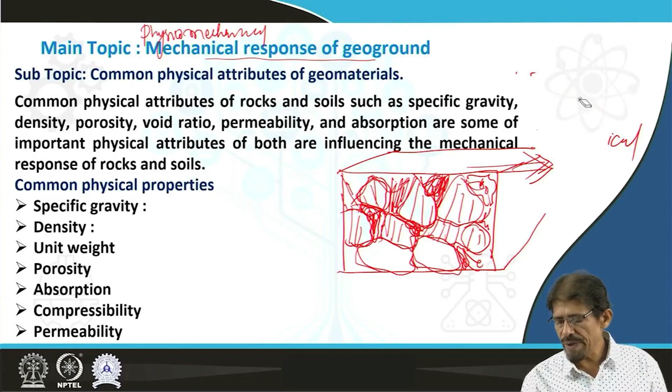As the name indicates, the term physico-mechanical is made up of two words: physical and mechanical. Physical attributes are physical properties. We have different types of physical properties. Here I try to enlist some physical properties that influence mechanical response, which we utilize in engineering geology.

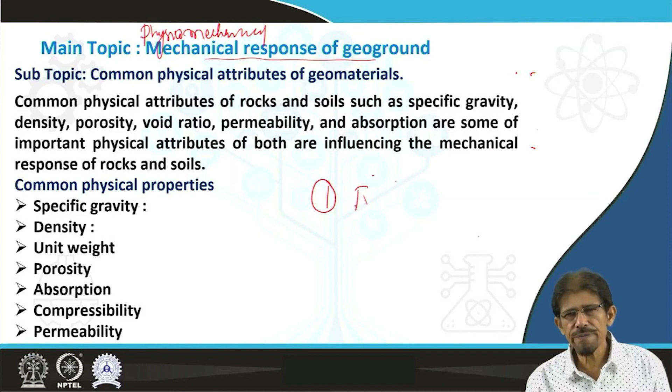These are common physical properties we have been practicing in geology from our beginning classes at the undergraduate level. The major physical properties in general describe, first, form; second, color; third, streak; fourth, luster.

Fifth, hardness; sixth, cleavage; seventh, fracture; eighth, some special properties. And partially we are utilizing specific gravity here.

These parameters are useful for selection of geomaterial from different commercial points of view, and this helps in identification of rocks and minerals.

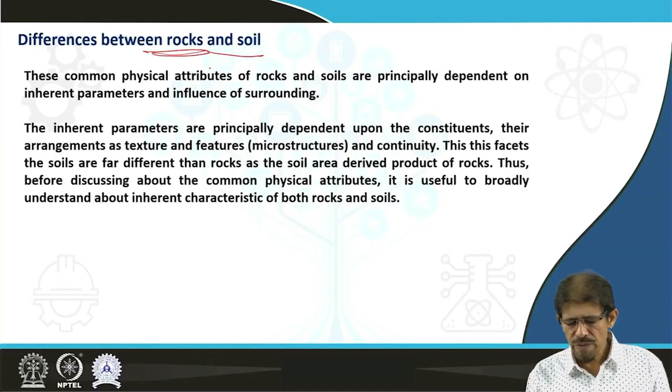If we are going to see the difference between rock and soil, this difference principally depends on the compressibility.

Compressibility depends on the arrangement of constituents. Due to arrangement of constituents, there are changes in arrangement of the grains and the availability of voids or pores. This availability of voids or pores, and the mineral constituent and arrangement of the constituent, we recognize in form of texture and microstructure.

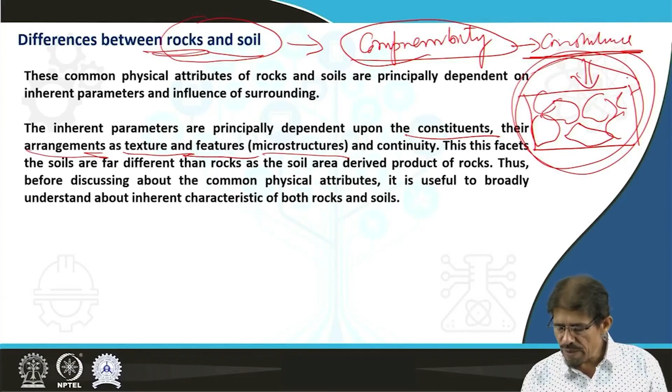In this way, we are going to see the rock is different than the soil.

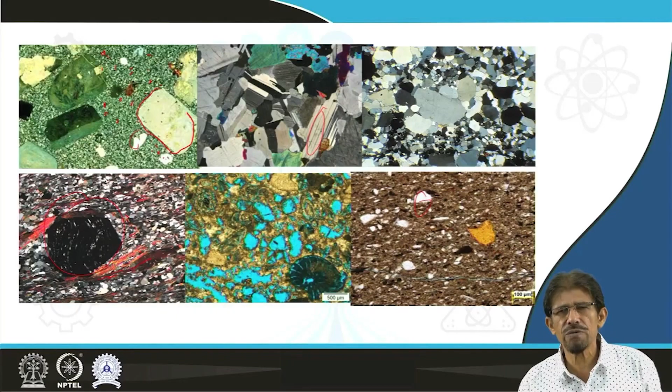Here you can see some of the photographs. This is the rock grains supported by some finer materials. Some of the portion you can recognize as gaps. Here you can see some microscopic gaps due to arrangement of this type of material. These photographs represent the arrangement of the mineral constituent in different fashion in different types of rocks.

You can see here the gap in case of soil. Soil gaps we can recognize easily. Here the gap you can recognize easily.

These voids are differentiating soil from rock. Due to presence of these voids, the compressibility is a compressible component. It means the degree of compaction in case of rock is more, and the degree of compaction in case of soil is less in comparison to rock.

So one by one we are going to discuss different properties. First we are going to discuss density. Density, very simple, density of any material is defined as the mass per unit volume. If we are able to know the mass of any rock, then we are able to calculate density.

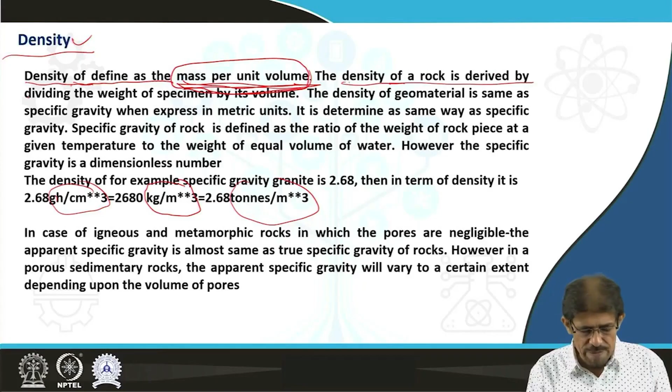As the unit, it is important to use kg per m cube, or ton per m cube, or gram per cm cube. The density of a rock is derived by practically dividing the weight of a specimen by its volume.

Technically, we are going to weigh this volume and modify these things with help of some concept of G and others. Actually, the density is the mass per unit volume. So volume we can recognize, and we can recognize mass from the weight.

The density of geomaterial consisting of rock is the same as specific gravity when expressed in metric units, but when we discuss the relative concept of density, then we define specific gravity because we measure this specific gravity with respect to water.

It is determined the same way as specific gravity. Specific gravity of rock is defined as the ratio of weight of rock pieces at a given temperature to the weight of an equal volume of water.

Due to relative appearance, what happens is the unit of volume of water and this rock concept eliminate the units. Therefore, this specific gravity has no unit.

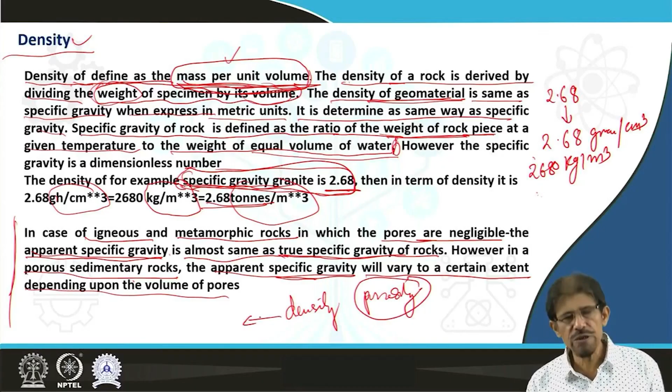The pores are more, density is less. Density less, pores are more. It means we can say that density and porosity have an inverse relationship - one is increasing, another is decreasing.

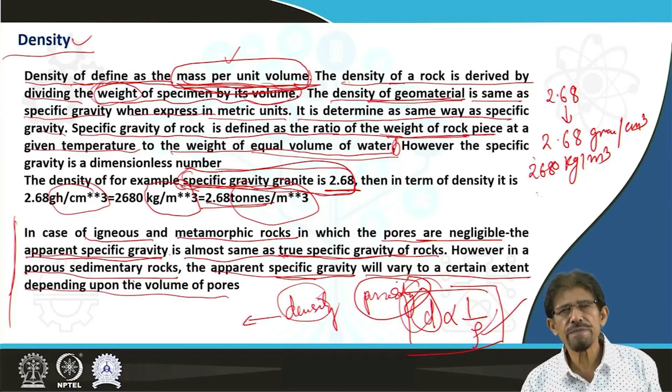Next property, and concerned to this, here formula-wise again I try to attract your attention. This density is m by v, presented in gram per cm cube, and this is simply the density of a rock specimen dividing weight of the specimen by its volume. Other things we have already discussed.

If we are going to classify density, then we can categorize this density as dry density, saturated density, grain density, and bulk density. Dry density is the weight of dry specimen with pores free of water per unit volume.

Very simple. Saturated density is the weight of rock specimen soaked in water per unit volume. Grain density is the weight of the powder of rock samples with respect to volume, that is per unit volume.

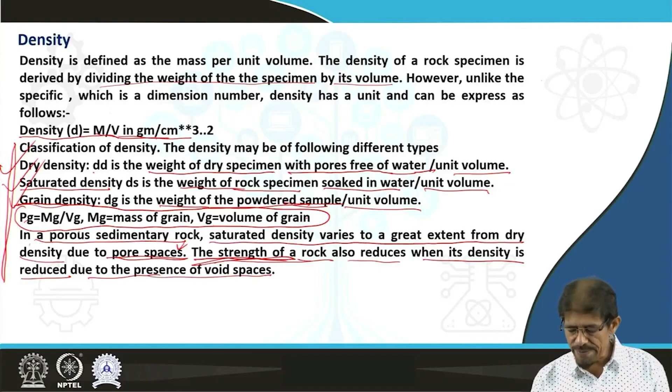The mechanical response of rock, that is the strength of rock, also reduces when its density reduces due to presence of voids. Indirectly we can say that strength increases when density increases, and decreases when density decreases. Not always true, but often.

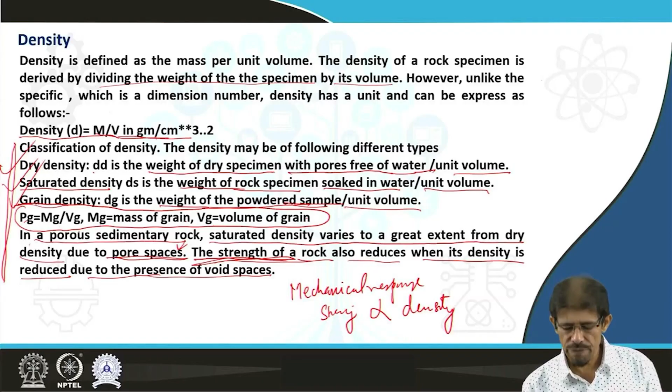Bulk density, as the name indicates, is defined as mass of a unit volume of geomaterial or rock. It depends upon the mineralogical composition, porosity, and amount of water present in pore spaces or voids. A bulk volume of rock specimen is the pore volume Vp plus grain volume Vg.

Let me draw your attention here. This simple diagram shows the grain and the pores. This is a pore and this is a grain. So pore volume, this volume, and grain volume, we recognize as bulk volume.

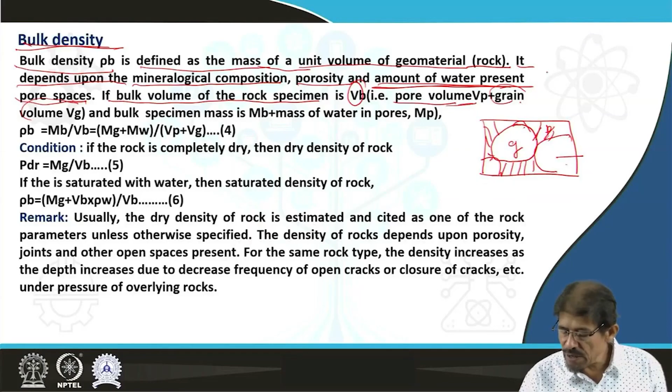Bulk volume, that is pore volume V pore plus V grain. What is the volume covered by this grain and what is the volume covered by this pore? This bulk specimen mass we recognize as MB plus mass of water in pores.

So bulk mass, the bulk specimen mass, is MB plus mass of the water in pore, or this mg plus mass of the water in pores, that is the bulk mass.

This bulk density is the ratio of the bulk mass divided by bulk volume. Bulk mass is the mass of grain plus mass of water present in pore, divided by volume of grain plus volume of pore. In this way we calculate bulk density.

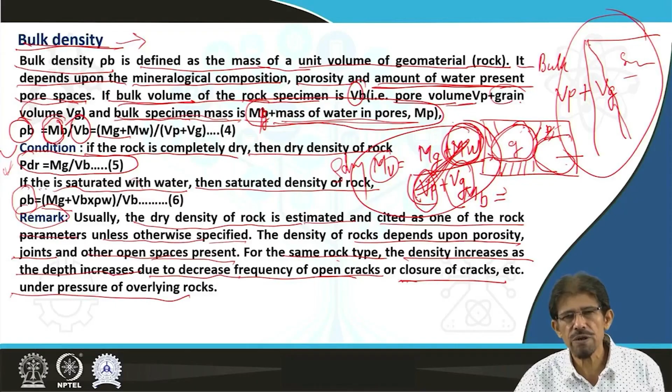In case of sandstone, it is different. In case of shale, with respect to depth, it is different. These aspects are generally utilized by geophysicists or petroleum engineers during logging concerned with the change of density.

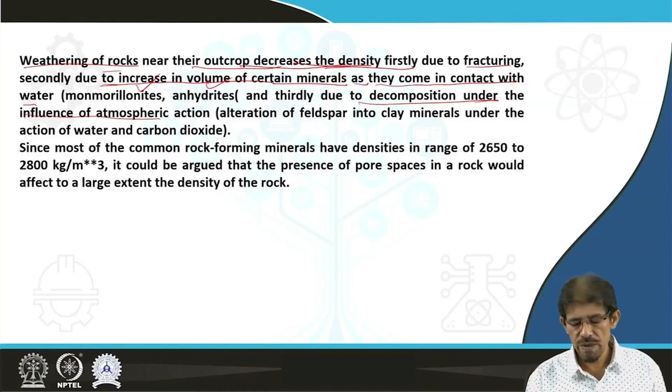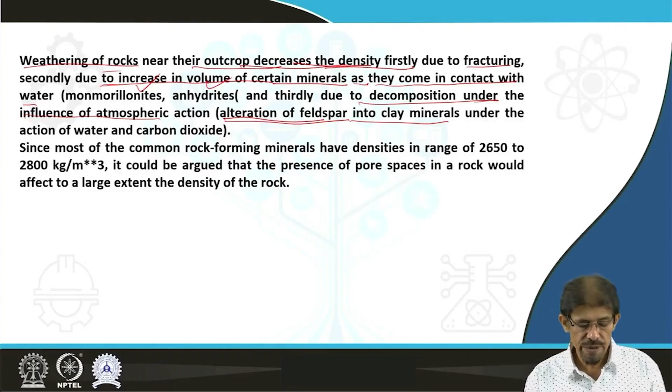Weathering of rock near the outcrop decreases the density due to fracturing, and secondarily due to increase in volume of certain minerals as a result of decomposition when they come in contact with water, for example Montmorillonite and anhydrite. Thirdly, due to decomposition under the influence of atmospheric action, for example alteration of feldspar into clay mineral under the action of water and carbon dioxide. So weathering also influences the density.

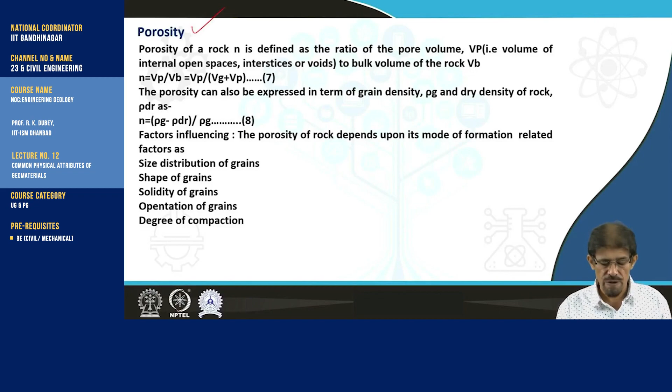So these are the factors that influence density. Next is porosity. Porosity is a very important parameter influencing the mechanical response of rock as well as the hydrological response of rock. The porosity of rock is defined as the ratio of pore volume.

Porosity is the ratio of pore volume, the volume of internal open spaces, interstices and voids, to the bulk volume of rocks. It is simply Vp by Vb, where Vb represents bulk volume and Vp represents pore volume.

P stands for pore, B for bulk. So porosity is Vp by Vb, where Vp depends on the pores, and Vb is a summation of both, since rock is made up of grains and pores. So this bulk volume is the bulk volume due to grains plus the bulk volume due to pores.

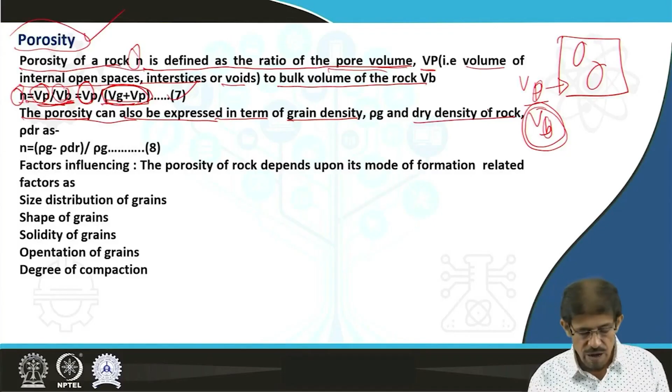This relationship is important for estimating porosity if some values are given. Porosity can also be expressed in terms of grain density or dry density of rock, since density has this type of relation. Then porosity can be estimated as the density of grains minus the dry density, related to grain density. In this way also we can estimate porosity indirectly, not directly.

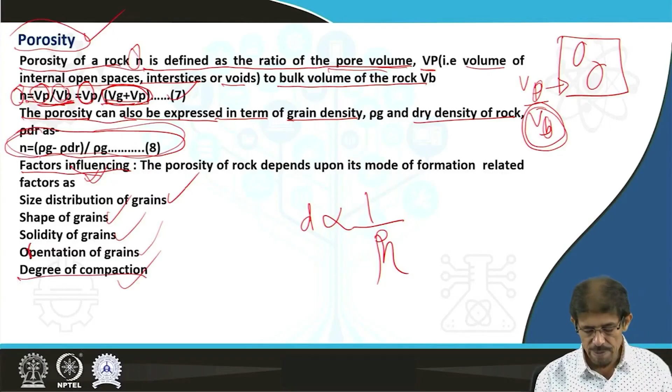The major factors influencing the porosity of rocks or soil are the size distribution of grains, shape of grains, solidity of grains, orientation of the grain, and degree of compaction. These parameters of the rock are going to influence porosity.

The next property is water content, which also depends on the pores. The water content of a rock is the ratio of the mass of water in the rock pores or void spaces to the mass of a perfectly dried specimen. In this way we determine the water content present in the pores.

This depends on the availability of the voids or pores. The saturated water content, when the pores are fully saturated, is the ratio of the mass of water in rock pores at saturation to the mass of a dry rock specimen, as described previously. This is presented in the form of a percentage.

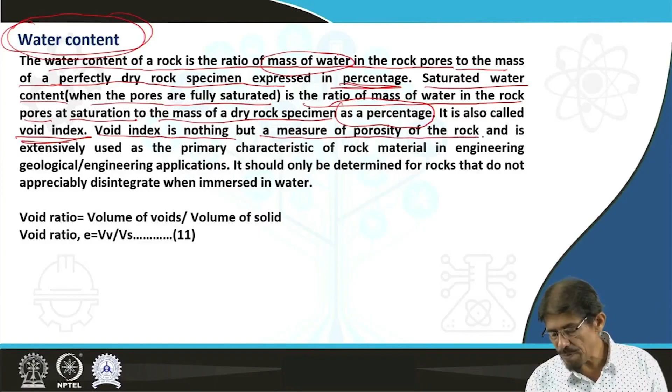Another term we utilize is void index or void ratio in engineering. Void index is nothing but a measure of the porosity of rock, and it is used extensively as a primary characteristic of rock material in engineering geological or engineering applications.

It should only be determined for rock that does not appreciably disintegrate when immersed in water. If the rock is soluble in water, then determination of the water content is very difficult. For example, rock salt is soluble in water, therefore the water content present in rock salt cannot be truly and practically determined.

The void ratio, as you are well familiar, is the volume of the voids with respect to the volume of solid, and the void ratio is utilized similar to the porosity and others.

The next very important parameter is unit weight, widely utilized in the field of geotechnical engineering, civil engineering, and engineering geological applications. It is the same as we use in the case of density, everything the same. Here we recognize the unit weight of a unit component of the rock.

In civil engineering work, the term unit weight is used for different types of calculations related to the unit weight of concrete, unit weight of water, unit weight of brick, mortar and others, which is the same as density when expressed in the unit of the metric system.

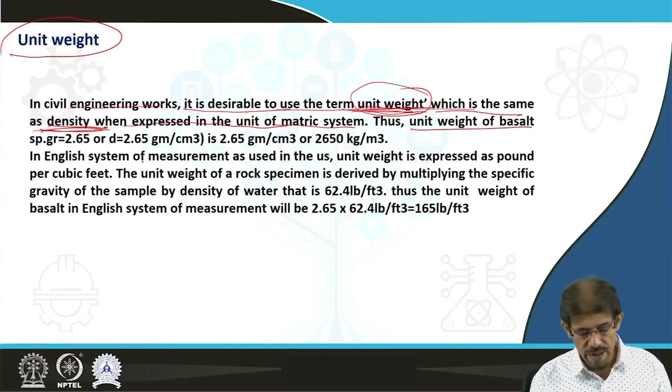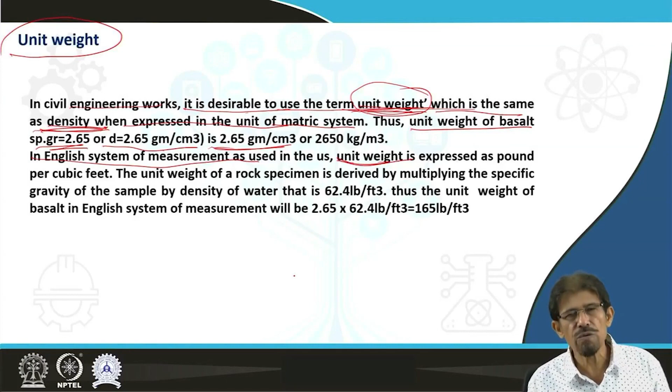For example, the unit weight of some rock like basalt, with specific gravity 2.65, then density is 2.65 grams per cm cube. In the same way we recognize the unit weight here. In the English system of measurement, we express unit weight in terms of pound and feet and others.

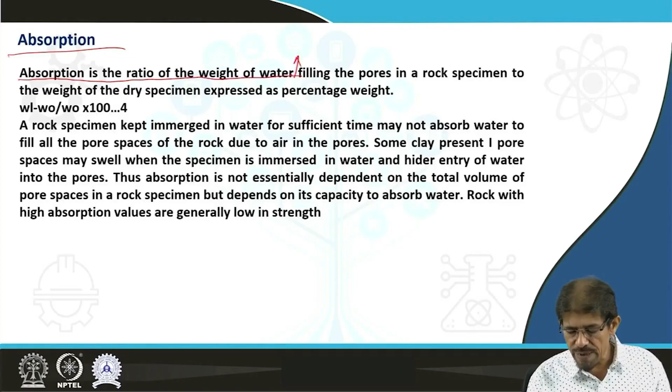Absorption is another parameter. Absorption is the ratio of the weight of water, similar to water content, filling the pores in the case of a rock specimen, to the weight of the dry specimen, expressed in percentage.

A rock specimen kept immersed in water for sufficient time may not absorb water to fill all the pore spaces of the rock due to air in the pore spaces. For example, some clay present in pore spaces may swell when the specimen is immersed in water and hinder the entry of water into the pores. Therefore, some of the pores present in sandstone or other rocks where clay is present in pores do not allow for full saturation.

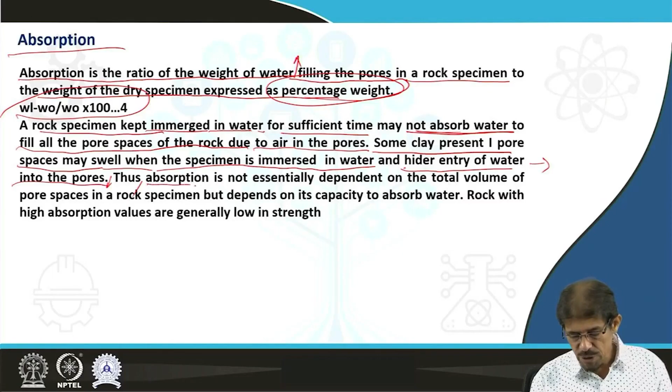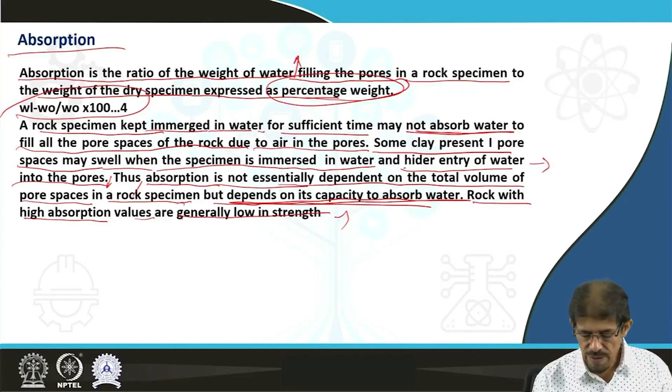Thus, absorption is not essentially dependent on the total volume of pore spaces in a rock specimen, but depends on its capacity to absorb water. Rocks with high absorption values are generally low in strength, so indirectly absorption has a relationship with strength.

In certain cases, as we have discussed in the absorption context, the clay present in pores shows some swelling. So what is swelling? Certain rocks having clay minerals or clay-like minerals are found prone to swelling, induced cracking and disintegration.

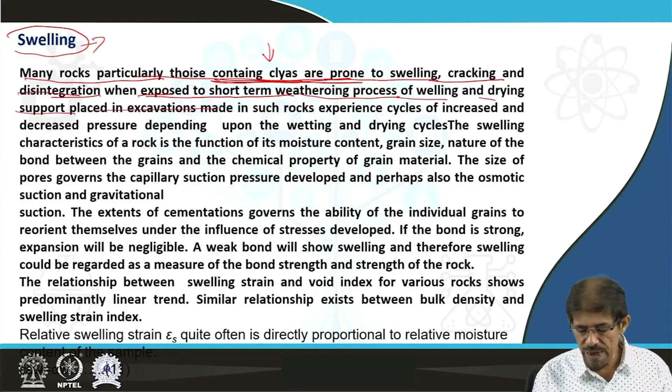When exposed to short-term weathering processes of wetting and drying, placed in excavations made, swelling causes an increase in pressure depending upon the wetting and drying cycle. Swelling characteristically depends on the availability of moisture content and inherent parameters of the rock like grain size, nature of bond between the grains, and the chemical property of the grain material. The size of pores governs capillary action, suction pressure developed, and perhaps also osmotic suction and gravitational effects. Capillary action is also important.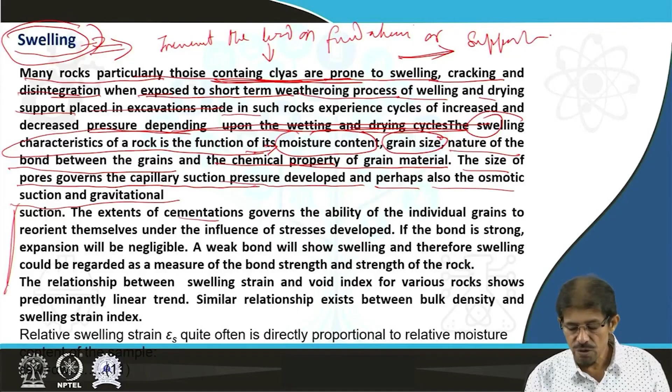Swelling is very important because it is going to increment the load on the foundation, and enhance the load on the support system of tunnels or any excavation. Therefore, swelling potential is very important for engineering geological applications.

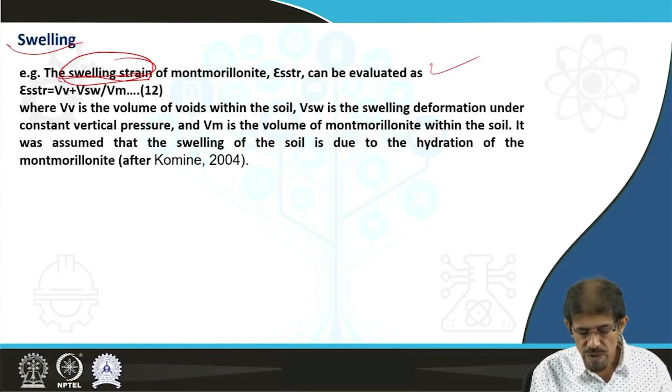Due to swelling there is formation of strain, recognized as swelling strain. Here we are going to see the swelling strain in Montmorillonite. If we evaluate it, Vv plus VSW by VM, where Vv is the volume of voids within the rock or soil, VSW is the swelling deformation under constant vertical pressure, and VM is the volume of Montmorillonite within the soil or geomaterial.

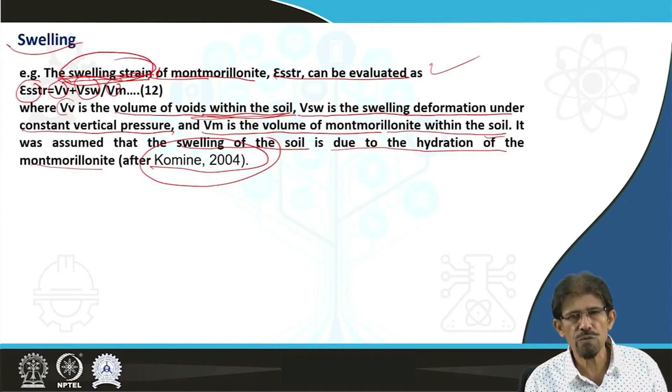It was assumed that the swelling of soil is due to the hydration of the Montmorillonite. This concept was given by Komine in 2004, which you will study at your advanced level.

Particularly for soil or unconsolidated materials rather than rock, compressibility is a very important parameter. On the basis of compressibility we judge which material is rock, which is soil, and which soil is good for foundation versus inferior for foundation. Compressibility is an estimation of the relative volume change of solid, here more concerned about solid than fluid, in response to a change in stress condition.

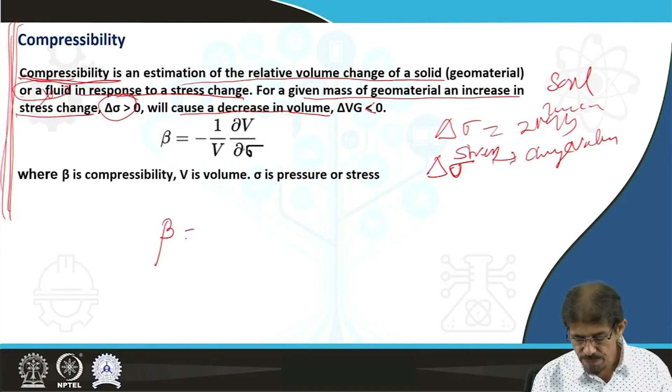For example, for a given mass of geomaterial, an increase in stress change of more than 0, suppose here change is 2 MPa, will cause a decrease in volume. This delta change in stress results in a change in volume. Compressibility is determined as minus 1 by V into delta V by delta sigma, where beta indicates compressibility, V is the volume, and sigma is the pressure or stress change.

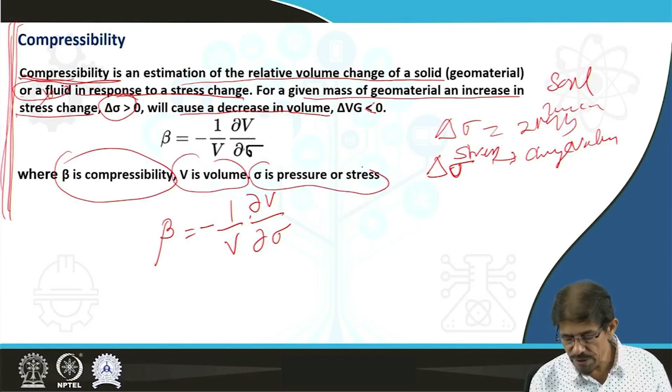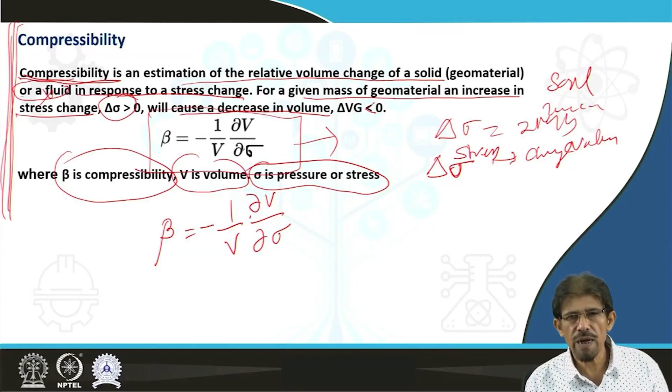In this way we calculate the compressibility, that is, how much a soil or material can be compressed.

So we have discussed some important physical properties of rock which influence its mechanical response. This material can be seen in interesting books, Introduction to Rock Mechanics or any engineering geological book, which describe porosity, permeability, specific gravity, and one thing we left, permeability, which is interconnected voids allowing movement of water through a medium. It is a property of the medium, of rock or soil.

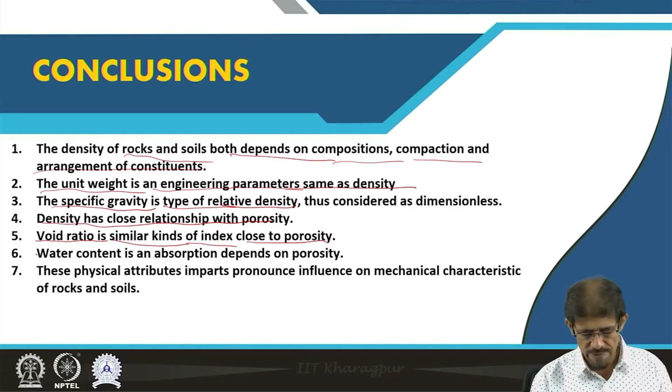So friends, now we are going to conclude. The density of rocks and soil both depend on the composition, compaction, and arrangement of the constituents, recognized as texture. Unit weight is an engineering parameter, same as density, used for engineering purposes. Specific gravity is a type of relative density without unit. Density has a close relationship with porosity, as already discussed. Void ratio is a similar kind of index close to porosity. Water content is close to absorption, depending on porosity.

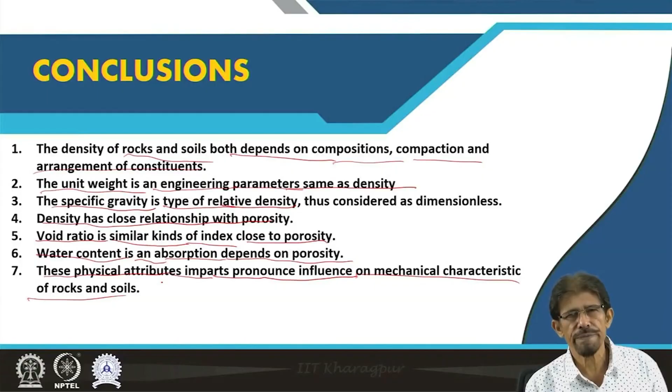These physical attributes impart a pronounced influence on the mechanical characteristics of rocks and soil. In this class, we have discussed the concept of physical and mechanical properties, particularly stressing the physical properties of rocks or soil which influence the mechanical response of rocks and soil or geomaterial. Next class, we will discuss the mechanical response of rock.

Till date, we have developed concepts regarding physical attributes, different types of geological agencies performing water-rock interaction and others, and different geomorphological features useful in engineering geological applications. Going forward, we will move towards changing geological information from qualitative to quantitative. Thank you.